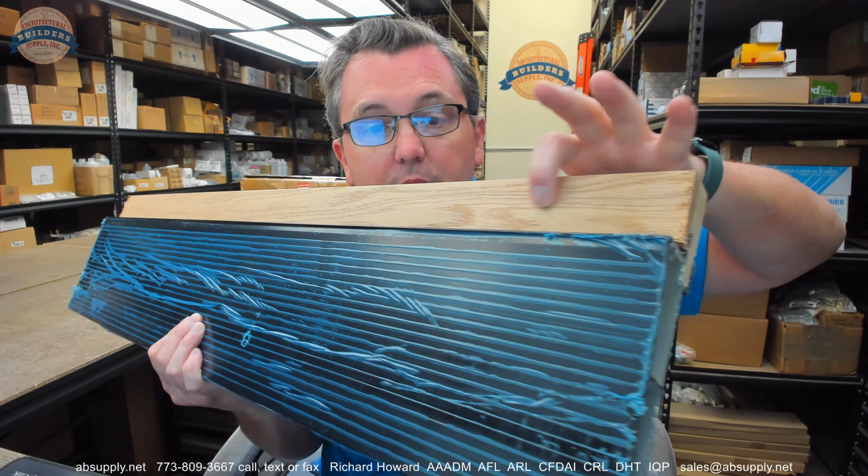This is just a peel-away protective film covering the dark bronze. The OAK means it's an oak exposed edge, and it will have a real quick brush painted white on the inside, and then a softwood pine species underneath that finished exposed oak portion.

So let's take a look at the supporting documentation, in the sense that there is a document here that will show us the overall size of the item. According to the supporting documentation below, it tells us that we're 8.5 wide.

A little bit of, yeah, okay, let's just take a look at it. 8.5 inch wide. My tape measure is telling me right at 8.5.

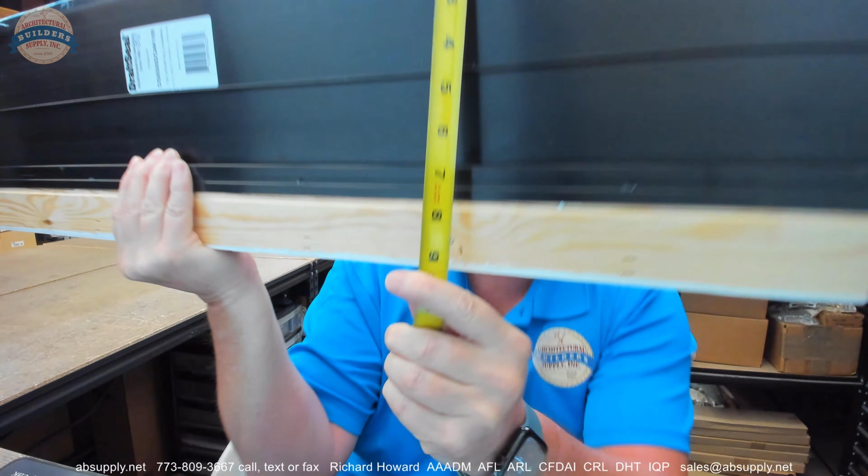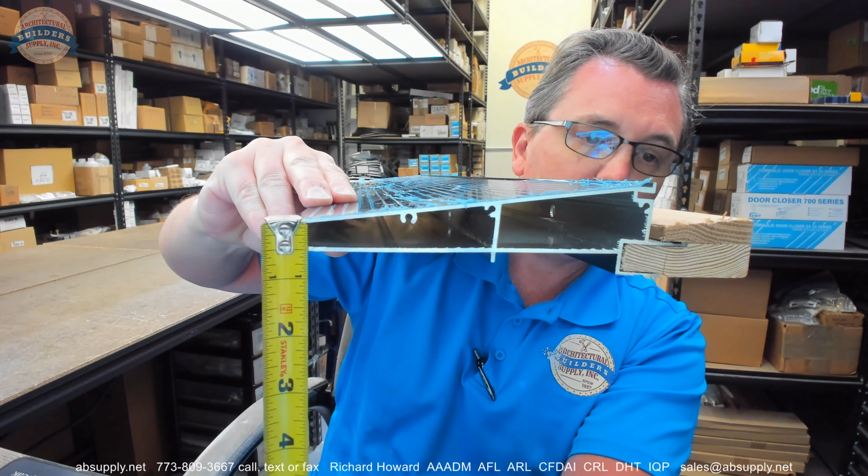That's good. Now we're going to have an overall height at the leading edge. I believe this is going to be 1/2 inch over here. You can count on that being 1/2 inch. Up over here at the high end, you can see that we're going to be about 1 5/8 inches, and the overall height of the oak end about 1 1/8 inches.

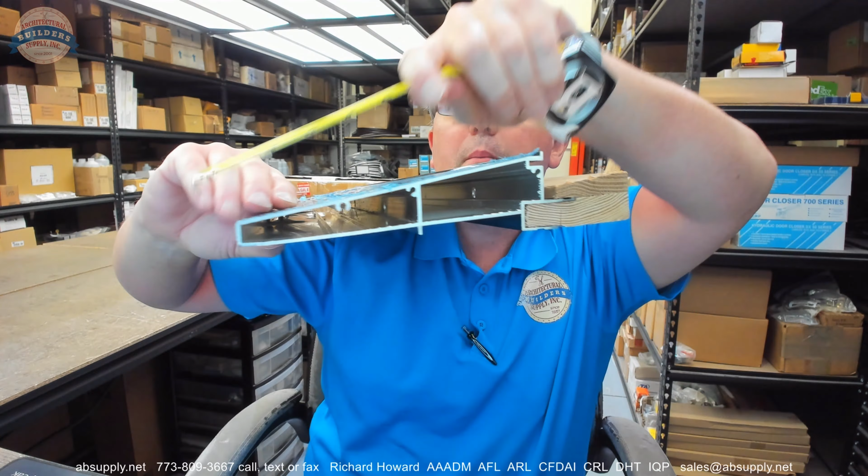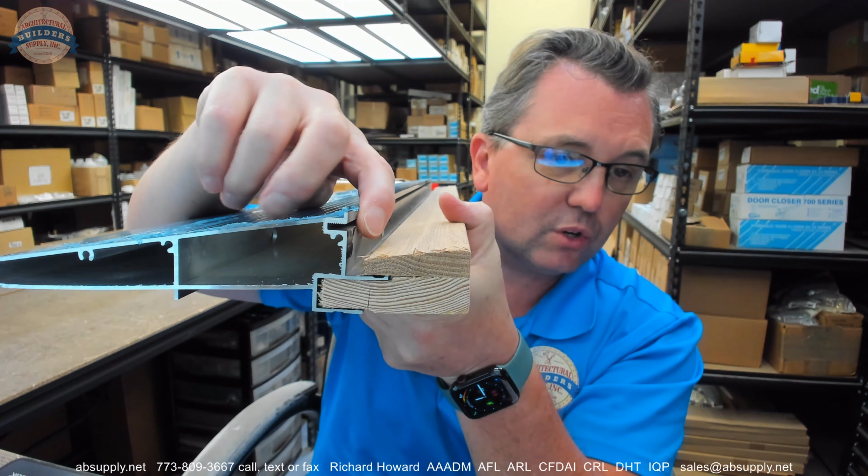Down here where it's a bit smaller is closer to 1 inch. Of that 8.5 inch, looks like we are dealing with about 6.5 inches worth, maybe 6 3/8 worth of aluminum. Now this area here is where you insert a piece of gasketing into. Gasketing is inherently not included with this at all, so be mindful of that.

Now this is a 36 inch length. This item is not made available from Draftseal directly as a 36 inch length. This client happened to require 5 or 6 of these pieces, whatever the quantity was, and the manufacturer sells this in about 12-foot lengths. So to satisfy the requirement of 6 pieces at 3 foot long, the manufacturer sold 2 12-foot lengths.

Right, and this is 36 inch exact. So those 12-foot lengths must be a little bit long on 144 inches because they pulled 4 pieces out of this, at least that's my understanding. And the client paid for 2 12-foot lengths, the cut charge, basically for a total of 8 pieces, but they required 6. They had to have 6.

They had to have this threshold, and the manufacturer was kind enough to indulge the requirement for custom cutting, which is not in their catalog. But they will, in all instances that I'm aware of, accommodate. So that is something I'm grateful for when it comes to dealing with Draftseal.

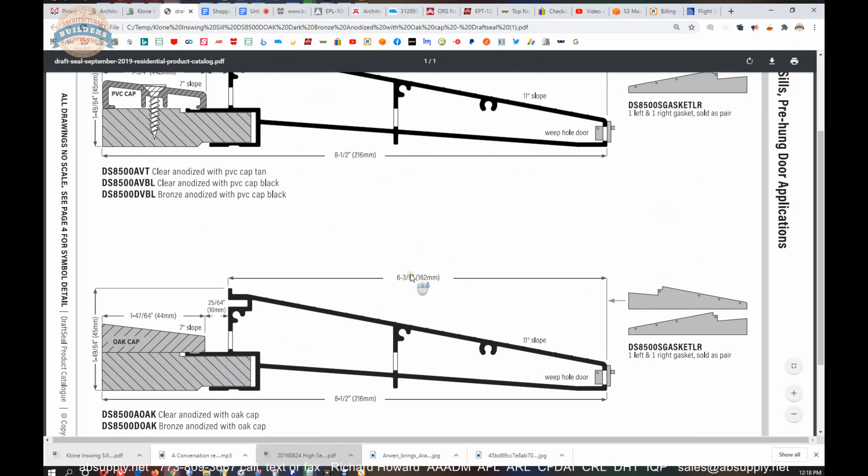Let's switch to the screen view and take a look at some supporting documentation. Now, here is indeed the item that we are looking at. Not much to see here. The link below this video to the extended description will show you. There's another thing that's not included either, and I'll show that to you momentarily.

DS8500DOAK, bronze anodized with oak cap. 8.5 inch, 6 3/8, etc. So the insert that would go here is not included, and any sort of gaskets that you would use on the end of this to close that off are inherently not included as well.

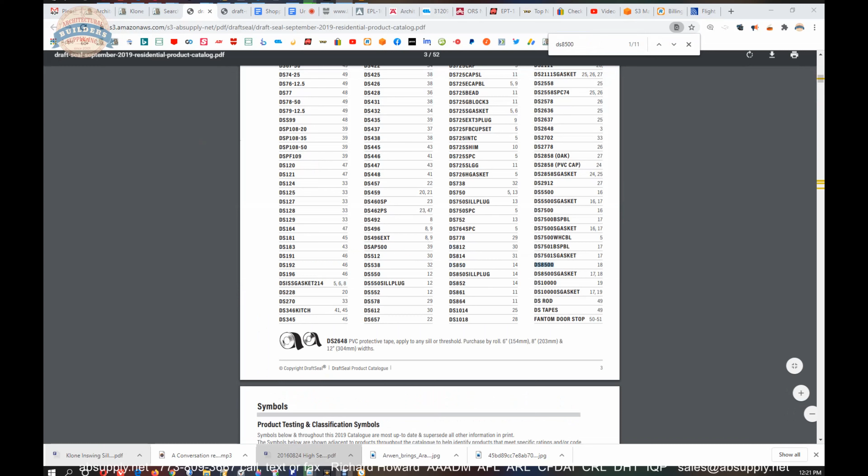And as we pull up that residential catalog and do a search for DS8500, we'll find all of the matches. But there are more than just that one match we were looking at earlier. It does show up as different variants. So this is going to be a PVC cap version.

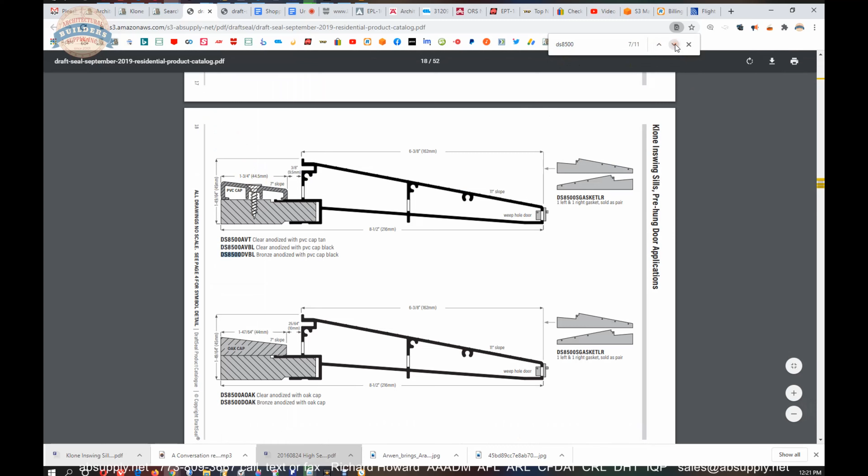Here's our original version in the full 52-page catalog. Be mindful that if you change the D to an A, you'll get a clear anodized aluminum finish out here. I'm tempted to say that that's not clear anodized and it's actually mill finish, but they're calling it clear anodized, so that's what it is.

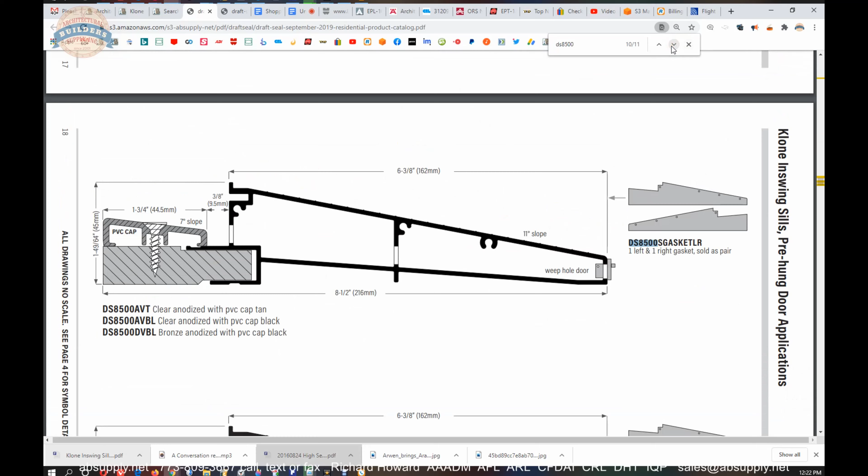Other gaskets. Okay, we can buy the gaskets separately, and it shows how they're used as seen here.

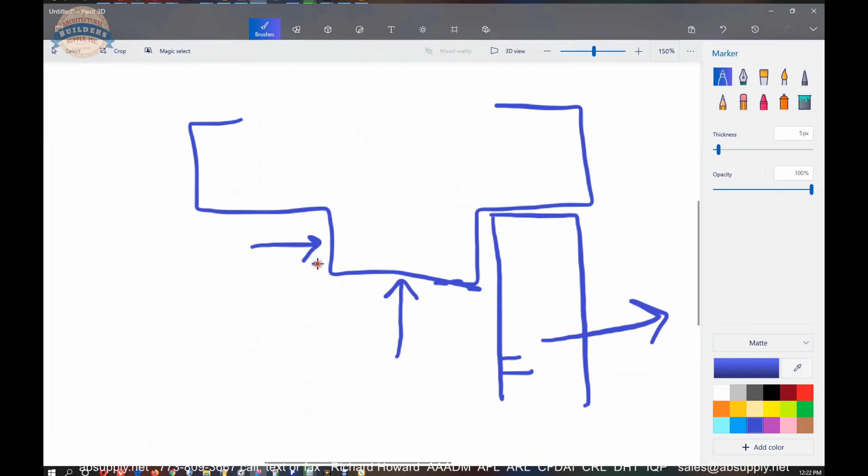Where would you want the gasket? Most definitely you would want the gasket if you were not running that threshold all the way in the depth of the frame, where the frame itself was deep enough to cover all of the ends of the threshold. And what I'm driving at here is, you know, if you have a... let's see here now.

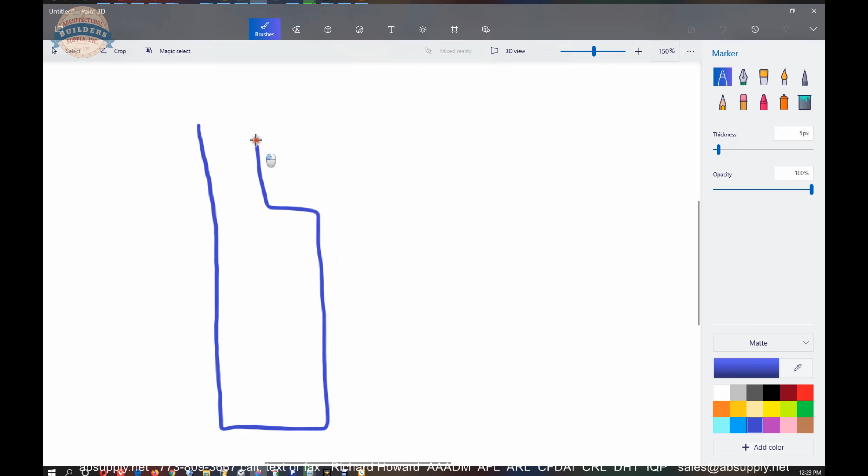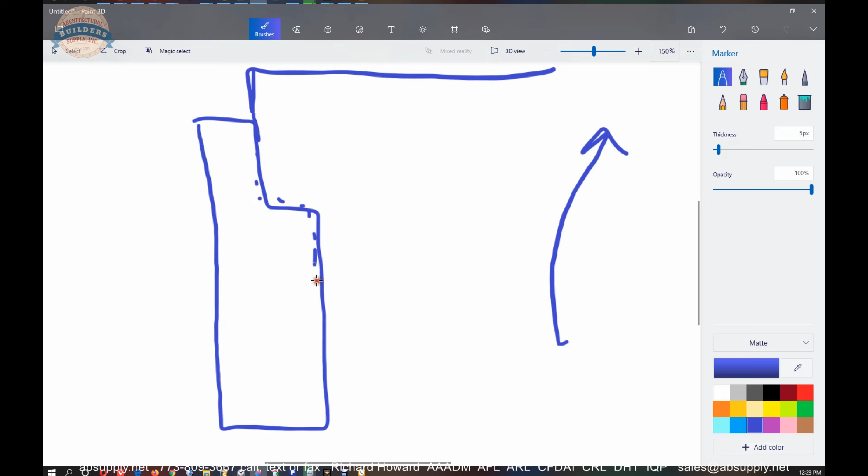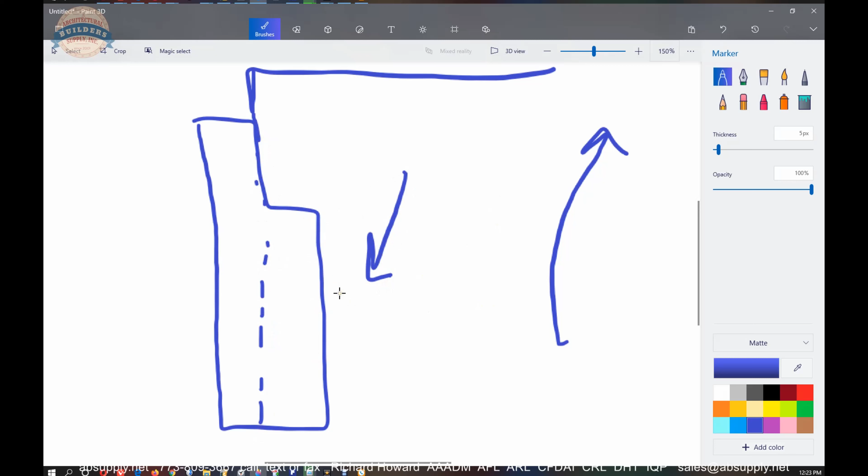Okay, here's your frame. Your door will swing in. If your threshold is literally going to be running out long, well, your threshold would go all the way down, and then you take the stop, and that's cut at an angle, or however you would do that, so that it sits on top of the threshold.

What I mean is your stop would be cut, your jamb would not be. Your jamb would run long, and your stop would be cut. So if you're going to have an exposed edge here, you're going to need that gasket.

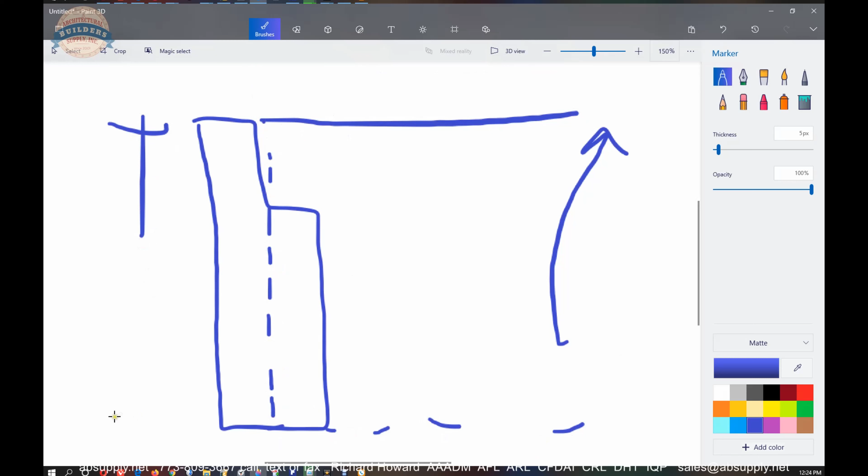But if your frame is deep enough to where that frame for that threshold is basically going to sit in here, then you don't have too much to worry about, meaning that this jamb depth is going to be at least 8 3/8, or pardon me, 8 1/2, I believe is what we said. So you are very likely going to want the gasket, would be my guess.

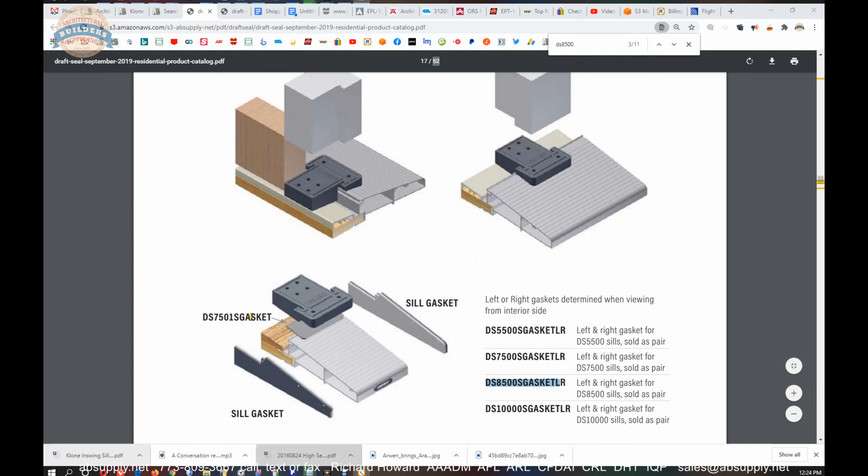This client opted for the thresholds only, and then of course, if you have a mullion or a jamb for side lights, they're going to give you that DS7501S gasket here.

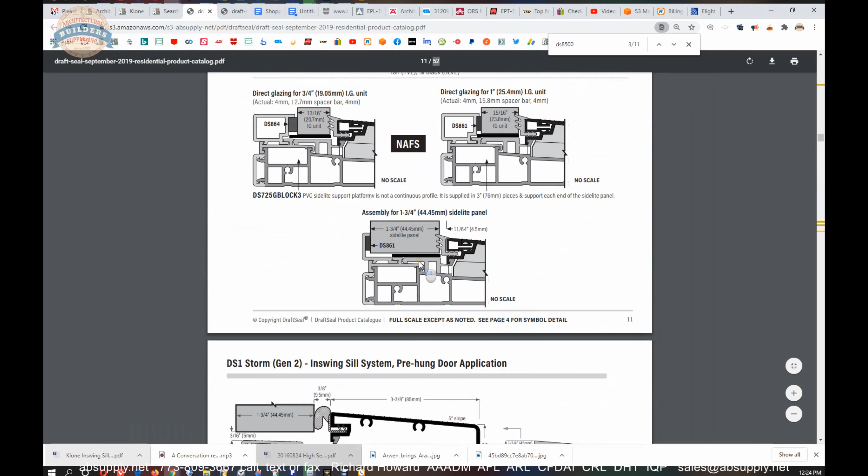So this is a very handy document to be able to review, not only this item, but as you can see as I scroll through, there is an enormous quantity of quite unique residential thresholds.

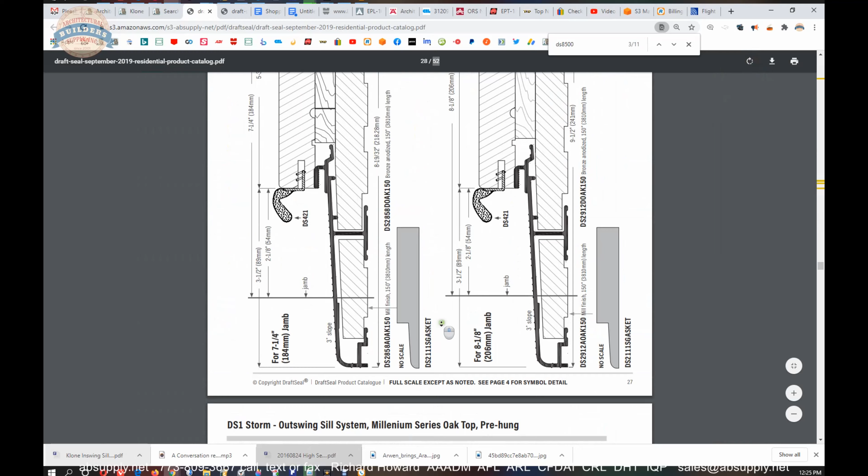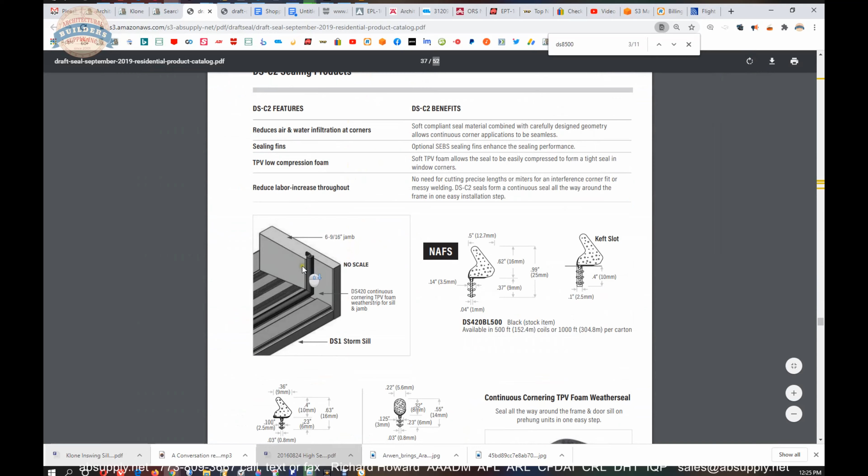Here is an opportunity where we can take a look at what an inserted piece of weather stripping would look like. We get to the back of the catalog, and we're going to be able to see our kerf-in style weather stripping, where you can pick up those part numbers separately, based on your application, as well as variations of that material.

Now, the commercial catalog is exactly what it sounds like: weather stripping that's going to be appropriate for commercial applications. It's a very handy document.

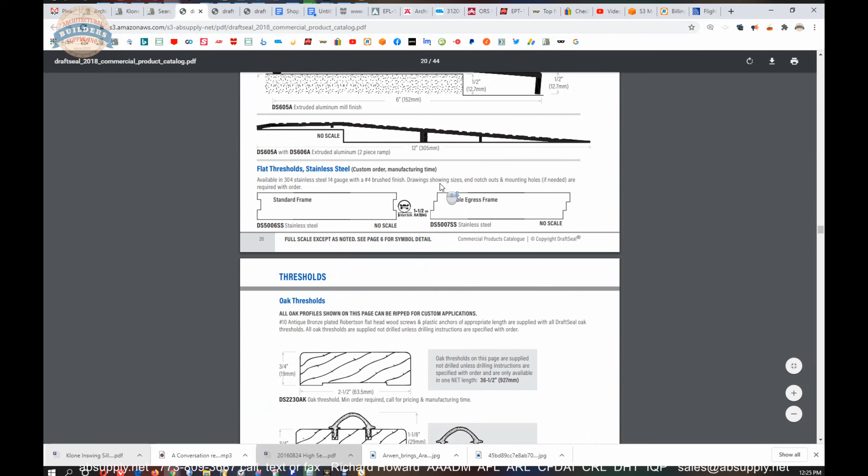If you're looking for threshold options that you do not see in your normal course of business, you might look at the Draftseal catalog, because they do have some solutions and approaches to solutions that are quite unique to them.

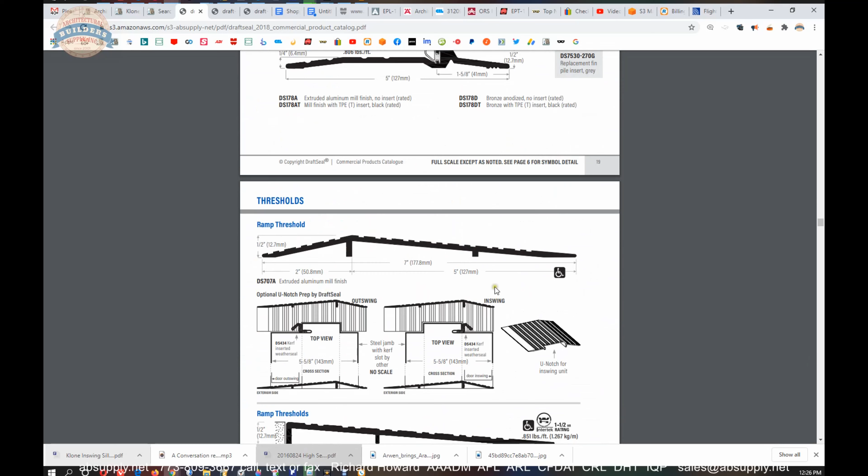Thermal barrier, thermal break thresholds are here, which isn't unique to them by any means, but they do have thermal break, as we can see, this unusual ramp threshold. Very wide thresholds as well, in saddle type, that are thermal break.

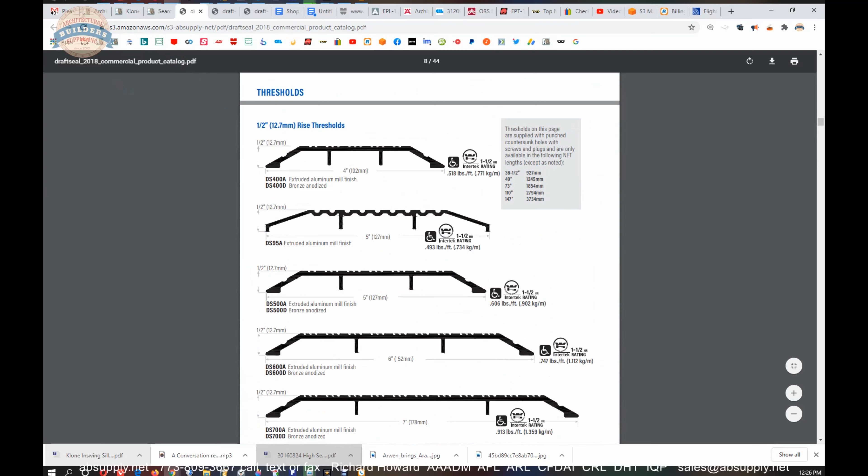So I think, if not to review these catalogs, at least bookmark them so that you are able to locate them again. Let's wrap up this video on camera.

Now, a few things to know about Draftseal. They are located in Canada, I believe in the general Vancouver area, somewhere out on the west coast. So at the time of this video, all orders that you would place to Draftseal through us would go on our stock order. We send that stock order once a week or thereabouts up to them, and then they ship it to our location. At that point, we then ship it out to you.

The reason we do that is because you might order a threshold, probably not this, but you might order something that's a piece of their kerf-in style weather stripping, and that material total might be $30. Well, an international shipment coming from Canada to your location is going to be substantially more than the cost of the material itself. So we remit those stock orders, and the material comes to us, and then we're able to ship it to you.

Albeit with a longer lead time, but with a shipping charge that is more in alignment with what you would generally expect to pay for weather stripping, which means the lead times again are longer, but we will certainly accommodate that, accommodate the orders with that one caveat.

Very accommodating folks over at Draftseal. We've had them cut pieces like this in half, or whatever the case is, to help a client reduce that shipping charge because of the length, number one, and then where they're located, number two. I hope to be able to continue to build on our volume of work with Draftseal because they're, as I said earlier, a very accommodating group of folks.

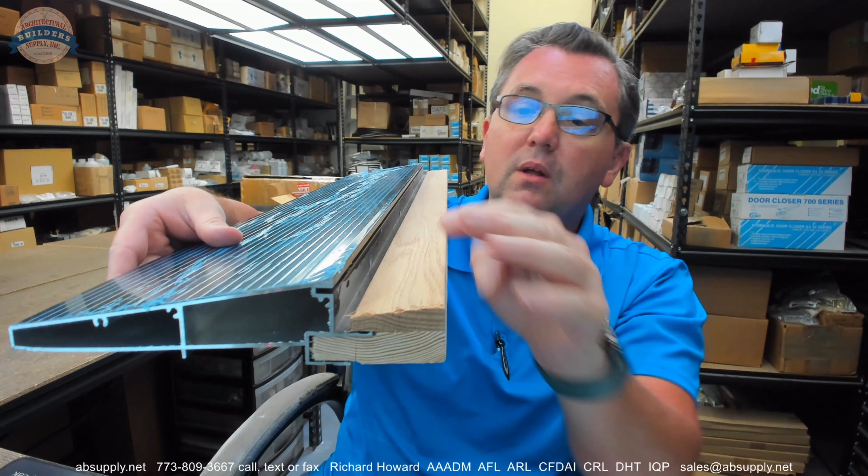Any questions on the Draftseal? This is their DS8500DOAK. I don't know what the marketing term Klone stands for. They call this a Klone Inswing. We obviously can tell what Inswing means, but this might be a marketing name for the brand of the threshold.

If you are looking for an unusual residential or possibly commercial solution for weather stripping, take a look at Draftseal. Thank you very much.